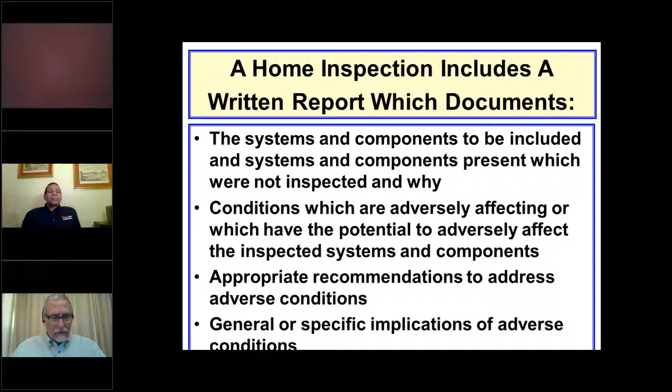The state of Arizona, for instance, requires that you put the implications of adverse conditions. They also require in Arizona that you put in every single thing that is in the state of Arizona Board of Technical Registration components and systems, even if they're not there, they have to be in your report. Doesn't matter, so it's boilerplate. And if they find they're not in there, they'll bring you on the carpet.

Know your standard. Again, we're not there to look at adequacy, effectiveness, and efficiency or causes. So whatever we find when we're inspecting, whether it's on cooling systems or plumbing systems, it doesn't matter. And we all know we're not required to determine compliance with codes, regulations, installation guides, and so on.

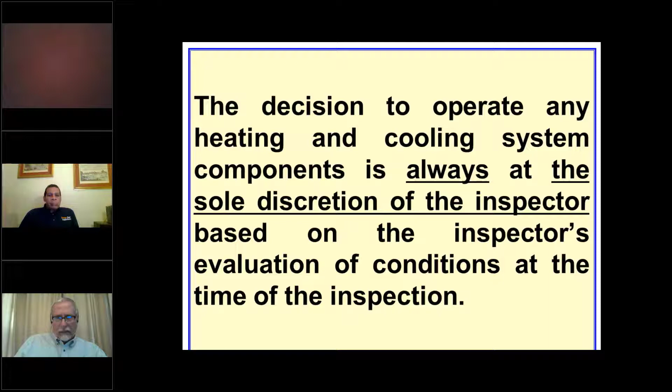This is important. The decision to operate any heating and cooling system always has to be at the sole discretion of the inspector, based on the inspector's evaluation or assessment of conditions at the time. With heating and cooling systems, that can be very important in terms of outside temperature, for instance, above which or below which you don't operate certain heating or cooling system components.

Now we're going to talk tonight about split systems. We're not going to talk about evaporative coolers or individual room air conditioners or anything else. We're going to talk about split systems.

As it says, it's basically, as we know, a mechanical indoor air cooling system. It incorporates a compressor, condensing coil, an evaporator coil, and an air handler, and it moves the air through a system of ducts. The two coils are separated from each other, that is split, and the compressor circulates a refrigerant between the coils.

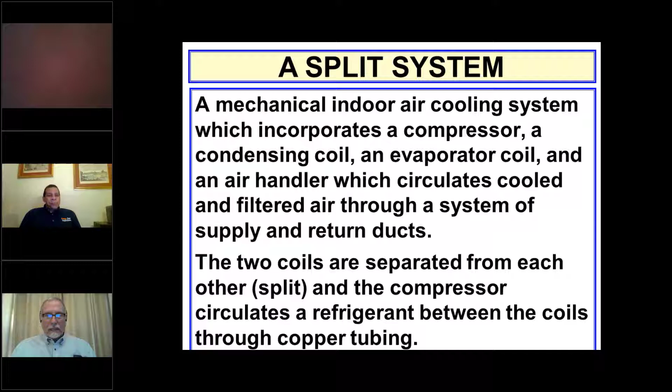The basic components: a thermostat to control the system operation, the outdoor unit which houses the fan, condenser coil, and compressor, the indoor unit, typically either a furnace or a fan coil, which houses the evaporator coil and fan to circulate the cooled air, copper tubing to carry the refrigerants, an expansion valve which regulates the amount of refrigerant going into an evaporator coil, and the ductwork which allows it to circulate.

We have to remember a little bit of our high school physics, not much, to understand how air conditioners work, and they're actually pretty simple. A refrigerant is a compound that absorbs heat easily. So you have a refrigerant, in the old days Freon, and nowadays different materials, and a compressor.

When you compress a gas, it gets hot. So the compressor, when it's in the cooling mode, comes on, the refrigerant gas is compressed, it rises to a temperature of as high as 150 degrees. That 150 degree refrigerant in a gaseous form, in a vapor form, goes out through a set of tubes in the condenser.

Air is pushed across it or pulled through it, which drops the temperature of the refrigerant gas to the point that it becomes a liquid because it's cooled down. Now, cooling is a relative term. It may still be 100 degrees, but it's in a liquid form.

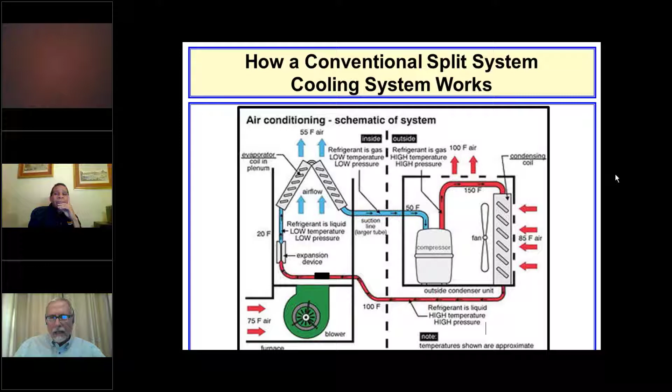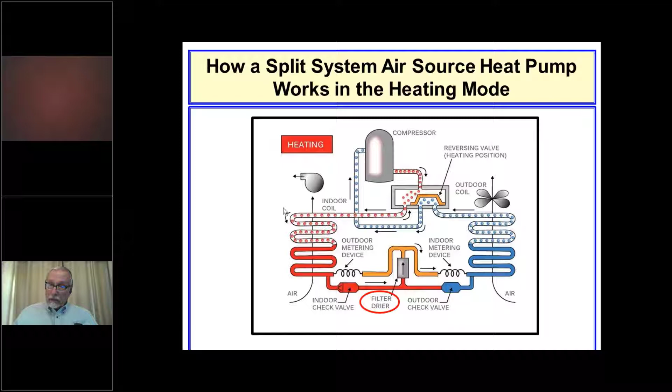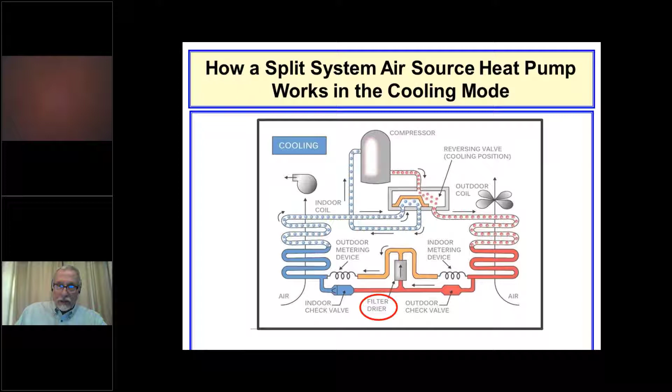And you make a good point. Our business is a technical business. We need to use correct technical terminology. Thingamabob and doohickey don't work for us.

And that doesn't apply simply to air conditioning systems. I've had to correct inspectors over the years. Don't call the device on a wall that you insert a plug end into to turn on a lamp the plug. It's the receptacle outlet. It's not the plug.

An outlet in electrical terms is any place that the electrical system is open to the room, to the outside, where it comes out of the wall or the ceiling or the floor. It's an outlet. Receptacle means you put in a device that receives the plug end of something you're going to plug into it. But we'll go on.

The purpose of a filter dryer is to reduce the potential for contaminants, such as water, to mix with materials in the system and produce acids. And it reduces the potential for impurities to contaminate the control element, the capillary tube or expansion valve, as well as for contamination of the compressor itself.

So the filter dryer is on there for a purpose. Sometimes you'll see them, sometimes you don't. Generally, best practice is to locate the filter dryer as close on a split system air conditioning system, as close to the evaporator coil as you can, so that it catches stuff early before it enters the evaporator coil.

There's a picture of a filter dryer. And if you see them, obviously you're going to look at it, and if it looks like it's damaged or rusted or otherwise, it's an adverse condition and you're going to report it.

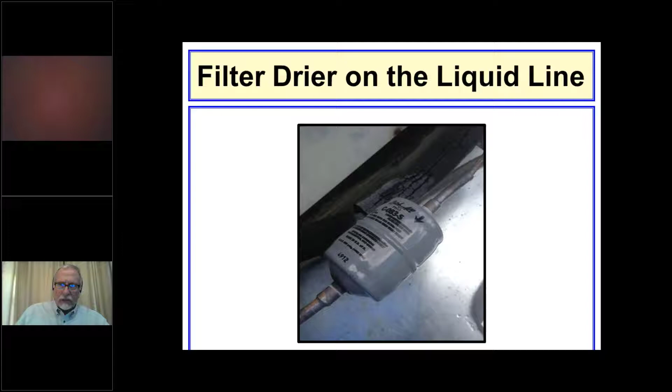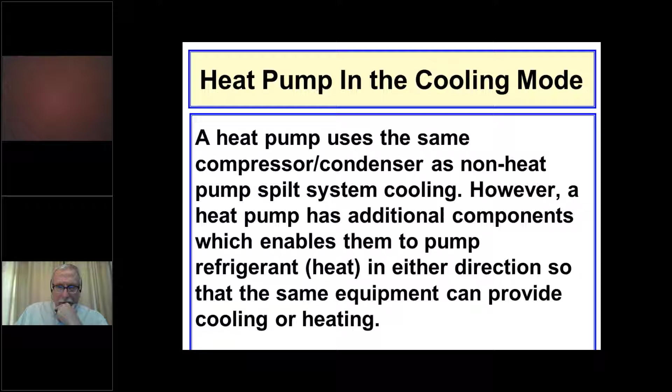As I said, the heat pump uses the same compressor condenser as a non-heat pump split system. However, the heat pump has the additional components which enables them to pump refrigerant heat in either direction. So it provides both heating and cooling, or can.

Heat pumps include a reversing valve, a bidirectional expansion valve, and in modern heat pumps, often these two valves are incorporated into a single component. And an accumulator. Now, you typically won't see the accumulator. It's usually inside the case holding the compressor.

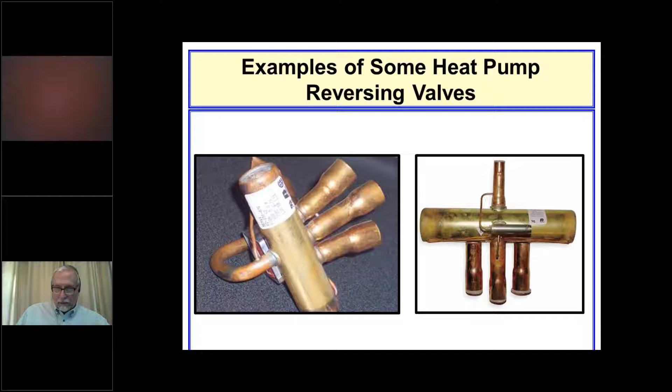There's an example of some heat pump reversing valves. Some HVAC contractors call them the cigar. If you can't find a data plate that says it's a heat pump, you can look down in through the top of the condenser typically, and if you see this, what they call a cigar, that's the reversing valve. There's an accumulator, but you can see there's the compressor next to it. It's inside the case. You're very likely not going to see that.

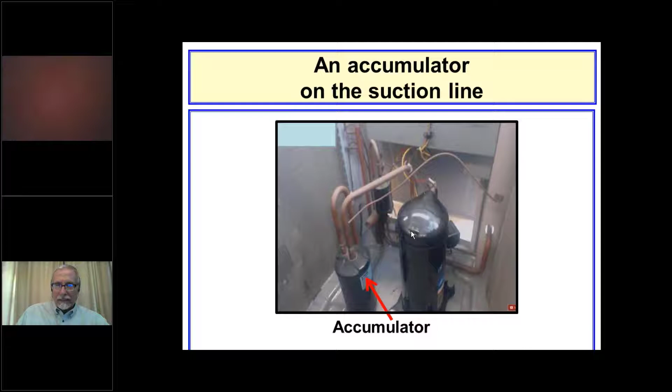Its function, it's on the suction line, return line of a heat pump, close to the compressor. It acts as a receiver during the heating and defrost cycle when system imbalance or overcharge from field service could result in excessive liquid refrigerant, which can damage the system. It can store the refrigerant until needed and feed it back into the compressor at an acceptable rate.

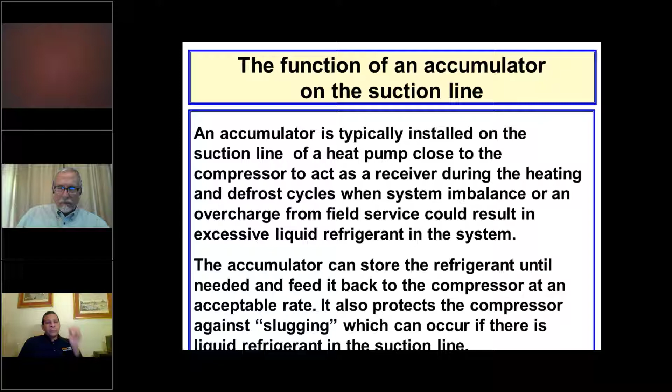So it protects it against slugging. And slugging is simply, remember our physics, you can't compress a liquid, which is why hydraulics work. You move the liquid at one end, it moves at the other, but gases can be compressed. And if liquid refrigerant enters the compressor...

It will fall directly into the crankcase and eventually cause the lubricating oil to foam. You can burn out a compressor because it won't lubricate properly. And so the accumulator reduces the potential for this to happen.

I will mention something right now. You'll notice I use reduces the potential for. This is something I emphasize.

There's a reason they don't call them vapor barriers anymore. They call them vapor retarders. There's a reason your watch isn't waterproof, it's water resistant. Barrier and proof are absolute terms. And we don't like to speak in absolute terms because then we're held to that level of the statement that nothing will ever happen. So you'll see a slide later which talks about using the phrase consistent with, and again, reduces the potential for, increases the potential for, but not eliminates or prevents.

When the outside temperature is below 65, in order to reduce the potential for damage to the compressor, that's when to operate it - only when the outside temperature is below 65, and that means take the temperature around the compressor. If the compressor's on the north side of the house, don't go to the south side where the sun is shining, or the east side where the sun has come up in the morning. Measure the air temperature around the compressor. That's the temperature you want to be aware of.

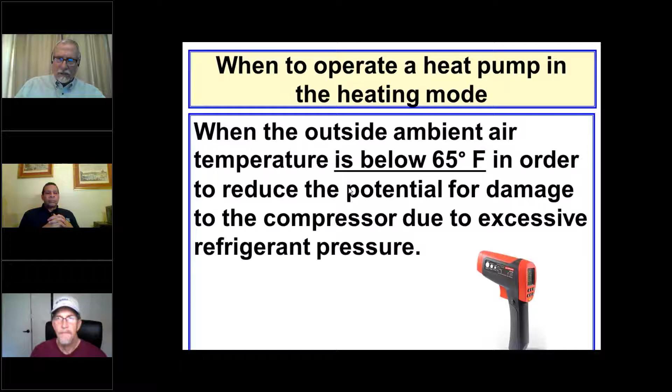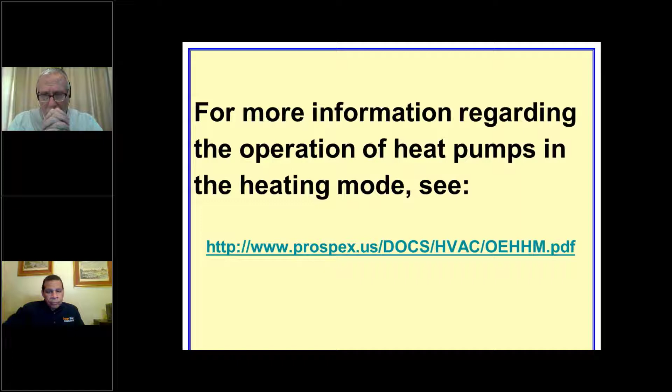For more information regarding heat pumps in the heating mode, I'll give you a little time to write this down. There's a very good ProSpex article on this. You can go in and read it to learn more about heat pumps in the heating mode.

Always note where your thermostat is set before you operate the heating or cooling systems, and return those thermostats to the original settings after completing the inspection. That's critical.

When to operate in the cooling mode: heat pumps, cooling systems, and central refrigerated cooling systems or split systems should be operated in the cooling mode only when the outside temperature has been at or above 65 for a minimum of 24 hours prior to the inspection, or for sufficient time to allow the oil in the compressor to reach a viscosity which will permit it to properly lubricate the compressor. So if you can't do it, simply note in your report that the compressor was not operated due to outside temperature.

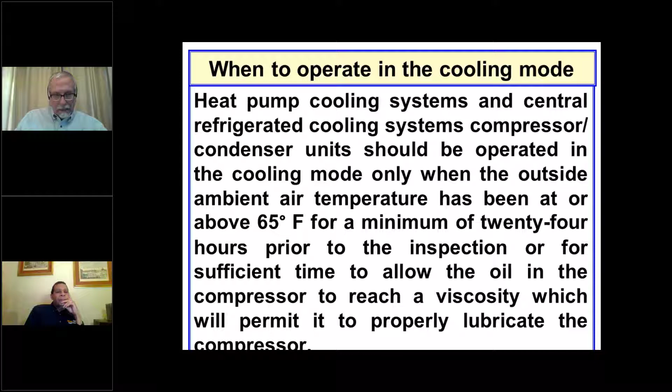And you've covered yourself, but you want to say so. When temperatures permit operation, before switching a conventional gas or electric furnace and heat pump split system cooling system from heating to cooling or vice versa, give it a little time to let it finish its cycle. If it's in the cooling cycle when you go in the house in the summer, let it shut itself off at whatever temperature the thermostat is set.

Kevin? Hello, I have a question. When that outside ambient temperature, the 65 degrees, does that apply when there's a heating belt around the compressor keeping that oil warm? Some compressors have heaters, both split system regular air conditioning compressors with gas furnaces, and some don't. But I would still say, I'm not going to take the chance, I'm going to just not operate it. I don't have the instructions for it, I don't know that the heat belt is working. That's me, I'm not going to operate it if the outside temperature is not up to 65. Thank you.

A quick question: so if the air temperature right now is 75, but it dipped to 50 last night, you're not going to operate it? No, I didn't say that. I said take the temperature of the compressor. If the temperature is... remember, 65 isn't a magic number, it could be 64, it could be 62. The idea is that you don't want the oil that lubricates the compressor to get so thick, to have such high viscosity that it won't circulate.

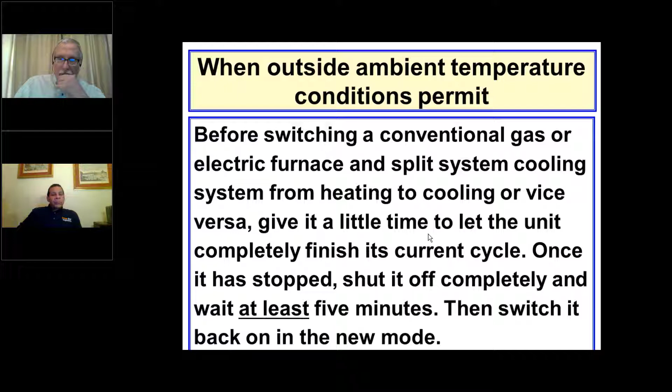Once it's run through its cycle, turn it off, wait at least 5 minutes, then switch it back on to the next mode. If it's in cooling, let it finish its cooling cycle, turn it off, wait 5 minutes, then put it back into heat if that's what you're doing, and vice versa. It's important to do this because the refrigerant needs time to go back to its starting pressure. Forcing the unit to start running while the pressure is still high can cause the compressor to lock up and increase the electricity it's drawing, which can blow a fuse or trip a breaker.

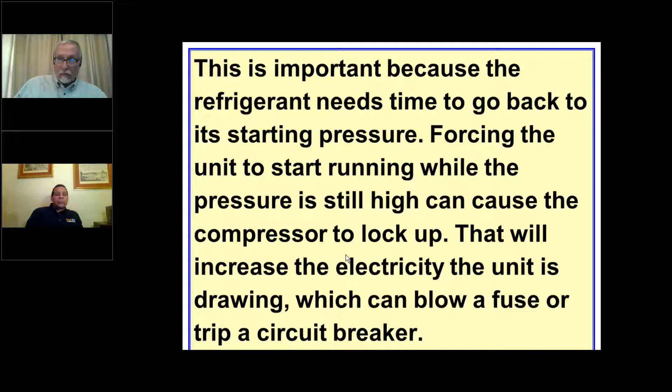When switching between heating and cooling, don't set the temperature to something drastically different right away. Obviously, if you're cooling and the house is at 72 degrees by the thermostat, you're going to set it at 71, not down to 68. Don't make it drastic, raise or lower the temperature by a few degrees at a time.

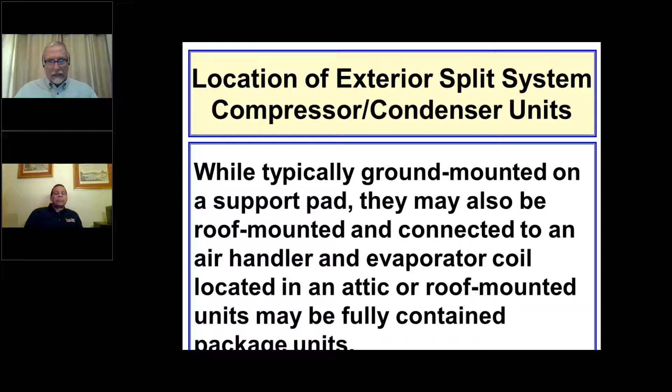Now, when you're inspecting a central system, we're going to look at the exterior components to inspect. You want to be aware of the location of the compressor condenser unit. While typically ground mounted on a support pad, they can also be roof mounted and connected to an air handler. An evaporator coil may be located in an attic, or it can be a roof mounted package unit that contains everything: the evaporator coil, the burners if it's a gas fired furnace, and the air handler, everything. Depending on the part of the country you're in, you will see these in different places.

And down in Phoenix, I used to see these mounted on the roofs all the time. This is a roof mounted package unit. There's your service disconnect, there are your supports, there are your flashings.

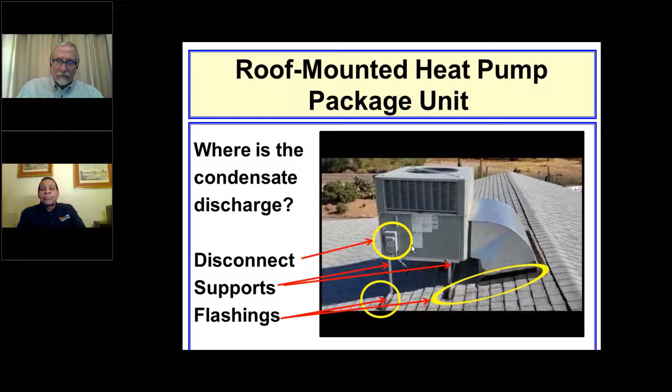It simply says here, where's the condensate discharge? It's on the other side, we just can't see it, but there should be a condensate discharge. We'll talk about those in a while.

With ground-mounted compressor condenser units, the support pad should be impervious to moisture and to insect and vermin damage. It should be protected from direct roof runoff. In other words, if it's under an eave where roof runoff would run directly on top of it, that eave should be guttered. The water does not need to run directly into the compressor.

Generally, the rule is it should be level within 10 degrees, because when it's significantly out of level, the oil in the system gets off to one side, and depending on what they're using to move the oil through the system, some of them use a slinger, it won't pick up enough oil. So always, if it's not within about 10 degrees of level, note that in your report as an adverse condition.

It should be away from clothes dryer and gas-fired appliance vent terminals. Clothes dryers because you don't want all the lint and the hot air blowing on it, and vent terminals for, I think, obvious reasons. Away from airflow obstructions, bushes, walls, and so on. 12 to 18 inches minimum on the side and 5 feet minimum above.

And not adjacent to a condensate discharge outlet that's going to soften the soil, because often they're set on soil where you have a basement or a crawl space, on soil that was put in as backfill after the foundation was poured. So you don't want to soften that soil by discharging condensate into it.

You want to look at the condenser coil fins, or the outside coil fins. Are they clogged? Are they dirty? Are they obstructed? Are they damaged? Look at them from the inside where you can see through the top as well as the outside. Protective fan and outside coil grilles, are they missing, damaged, or missing parts? You want to look at that.

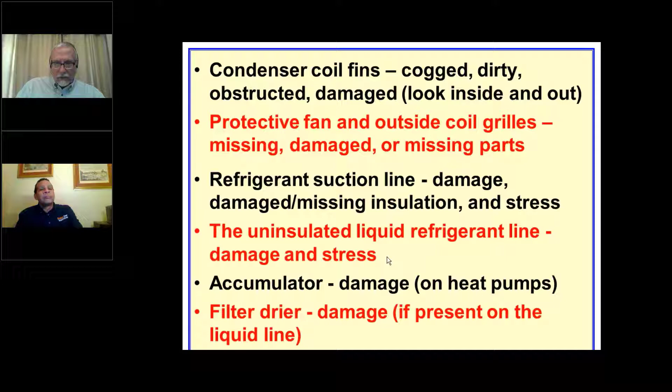Electrical components that may be damaged or loose. Any valves that are visible that are damaged.

Exterior electrical service disconnection means - if it's not located within sight of the exterior unit, if it's loose, if there's damage to its housing or the conduit between the disconnect and the compressor condenser, if it's not protected against unauthorized access, children, and at least 5 feet or greater from a pool or spa. And the reason for the protection from children, we'll see here in a minute.

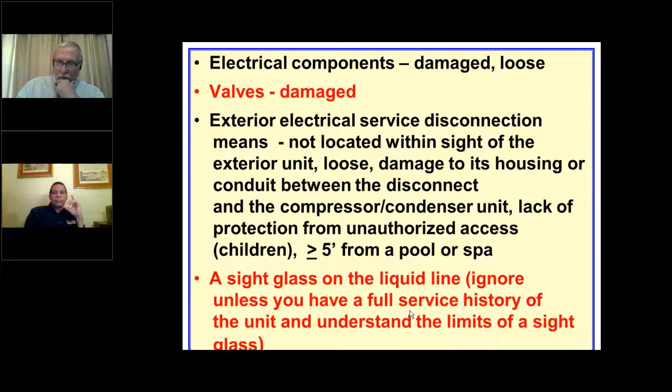If it has a sight glass, ignore it, because there are too many factors that you're not going to be aware of, and you don't have a full service history to understand the limits of a sight glass. There's a pull-out cartridge fuse disconnect.

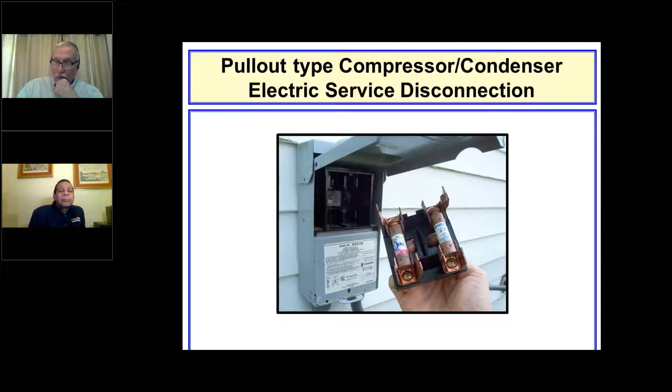All right, those things are often within 4 or 5 feet of the ground. Sometimes they're on the side of the unit. A child pulls that out and sticks something in there where the blades go in. No, that has to be secured. Should have a little lock on it or some method of securing that cover so a child can't get into it. There's airflow obstructed by shrubbery.

Condenser coil location requirements. Here you have under a deck or other surface above it. You see 4 to 6 feet recommended. 5 feet is sufficient.

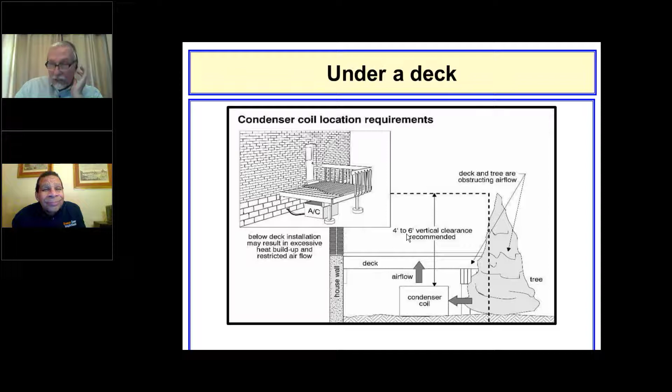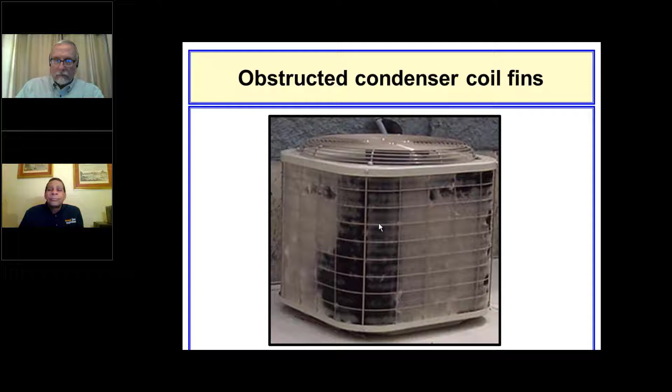There's a condenser coil that's obstructed by debris, leaves, and so on. Here's one that's obstructed by cottonwood cotton. We have a lot of cottonwood trees out here in Colorado, and in a good spring, they'll put out all of this fine cotton, they call it, into the air. I've gone on commercial jobs where there are multiple air handlers on the roof of a flat roof of a commercial building, industrial building, and literally been able to take a blanket of cottonwood cotton off the coils. So you want to look for obstructed.

You don't see a neutral, do you? Where's the grounded neutral? It's not necessary. One of the 120 volt or 125 volt measured hot conductors is always alternating opposite of the other. So when one of the wires is bringing in current, the other is returning it to the panel and completing the circuit.

Thus one of the others is acting as the neutral, and both the compressor and the condenser motors are typically 240, unlike a clothes dryer, where you have to have a neutral because you've got a 120 volt circuit as one of those incoming 120 volt legs for a 220 clothes dryer, and it's operating the motor that turns the drum in the dryer. That's a 120 volt motor. The elements that provide the heat for the dryer are 240.

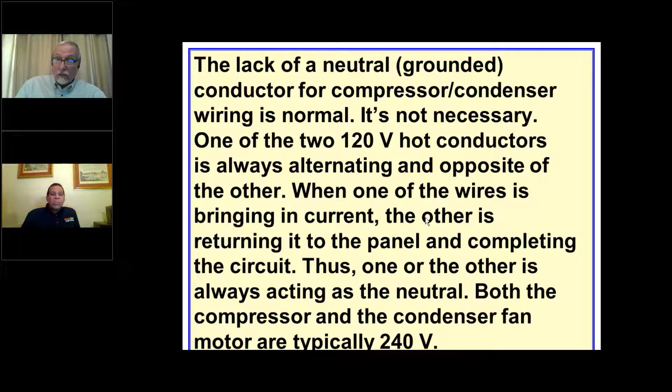So the difference, if one of the 120 volt legs is pulling, say, 23 amps and the other is pulling 17 amps, that means you have 6 amps running on the neutral, which is why you now have to have a ground with range ovens and clothes dryers, because you will actually run current on the neutral, but not with the air conditioner.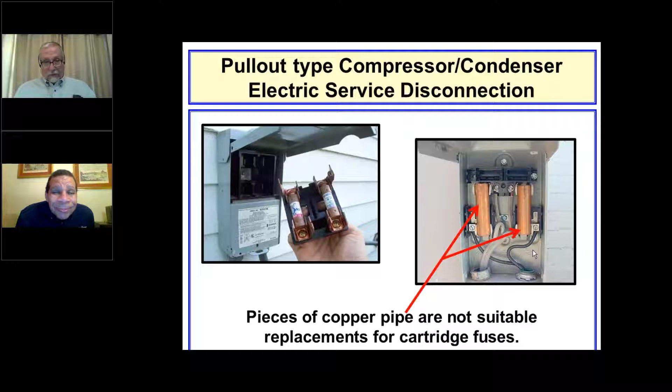I don't know if any of you have ever seen this, but I have seen copper tubing put in place of cartridge fuses. No, nope, don't want to see that.

You should have, and this is more recent in terms of the last 50 years, a receptacle outlet for use by the service technician, so they can plug in equipment they need while servicing a unit. Whether it's in an attic, crawl space, or outside, it should have a 125 volt, 15 or 20 amp GFCI receptacle outlet installed within 25 feet of it.

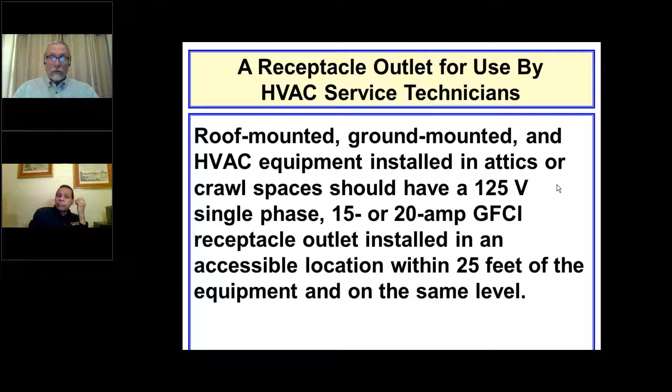If you have roof mounted units, I know there are people from Florida and other parts of the country, all electrical should be installed in electrical metallic tubing or in liquid tight flexible metal conduit. Other HVAC wiring should be installed in conduit appropriate for the location.

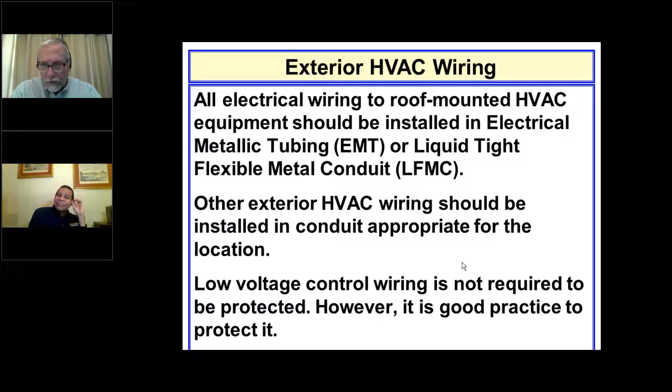Low voltage wiring isn't required to be protected, but it's a good idea, because if the insulation gets brittle from exposure to weather, it can short out on the two or more wires in the control, the 24 volt low voltage. If one shorts out against the other, it can blow the controls, and now your thermostat's not going to work. So it's not required that they be in any kind of conduit, but it's not a bad idea to protect them.

If conditions allow the system to be operated, listen for atypical noise and vibration during operation of the compressor condenser. After the system has been in operation for 15 minutes, the suction line should be cold to the touch, should not be frosted or ice coated, and the liquid line should be hot to the touch.

Frost or ice on the suction line may be caused by obstructed airflow due to a dirty coil, dirty air filter, collapsed duct insulation, and a number of other factors. But if you see frost and ice, write it up as an adverse condition and call for a qualified HVAC contractor.

One of the things you can do in winter, when you can't operate a split system compressor condenser on a regular gas-fired heating system, is you can still look at the compressor to see if it's level. You can still look at the insulation on the refrigerant lines. You can still look for damage and obstruction of the condenser fins. I've actually looked down inside and seen cracks in the fan blades where they're starting to fatigue.

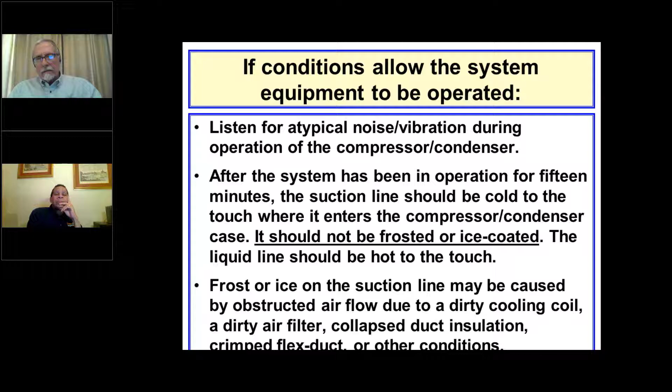And if it didn't operate, it was seized. There's a gutter over the compressor condenser if it's under a roof eave, so there are things you can do to still inspect the system. You just can't operate it.

On roof mounted units, always look at the supports and the flashings, and make sure they're away from any roof mounted dryer vents and gas fired appliance discharge terminals, away from airflow obstructions, just like before. Also make sure the condensate discharge piping is not damaged.

Or improperly located or obstructed. There's a low exterior condensate drain adjacent to a foundation. Not such a big deal perhaps on a slab on grade home, but it may be on a home with a crawl space or a basement.

Also in areas where you have an attic mounted air handler, you're going to have two condensate discharges: one for the primary pan that normally drains the condensate off the evaporator coil, and a secondary pan in case the primary pan or its drain becomes clogged. The secondary pan should drain to the exterior.

In my view, and certainly in certain parts of the country like down in Phoenix, they want that secondary pan drain to be up high where you're going to see it dripping. The primary can be down low, but if you see it dripping, you know there's a problem with the primary. So they want to see it up high.

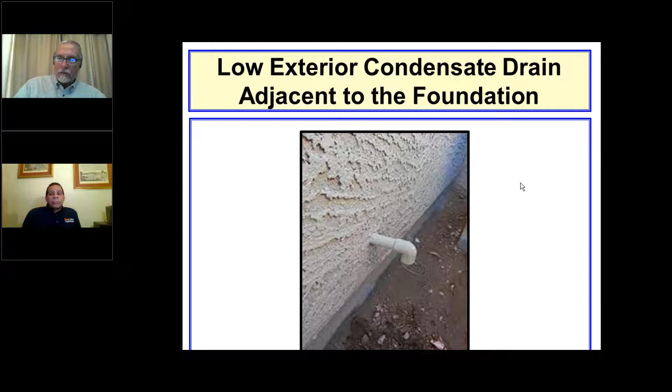Some people suggest you bring it out a little ways from the wall and let it drain in front of a kitchen window. So if you're standing there and you see water coming out of it, you know that you've got an issue with the primary condensate drain.

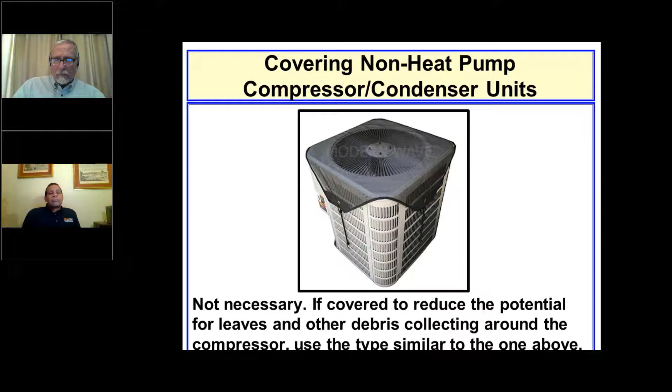Heat pump and non-heat pump compressor condenser units don't need to be covered. In fact, it's recommended that they not be. The manufacturer makes those things to be exposed to the weather. If you put a full cover on it, it can't breathe. You can get condensation underneath the cover, and corrosion of the components inside. So if it has a cover at all, it should be a cover like this, just to keep debris out, leaves and other things when it's not in use.

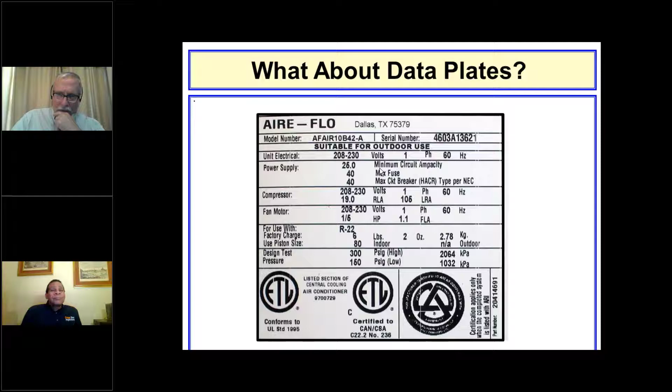A lot of inspectors like to look at data plates and try to interpret them to determine whether something is right, wrong, or whatever. One of the biggest things they use them for is determining the age. If they've got a furnace, compressor, or air conditioning system, they can look at the brand and serial number, which is often where they code the year of manufacture.

They'll say, well, this was manufactured in 2000, it's 2021, so it's 21 years old. I want to go back and remember that the purpose and scope, according to ASHI's standard, is that you're to report components that are near the end of their service lives. That may be easy enough to do on a roof covering, but not so with HVAC systems. You're not required to give the remaining life expectancy of systems and components.

Furthermore, age alone does not determine whether an air conditioning system is near or at the end of its life. Unless you have the service history and use history, how many months of the year it was used, how often it's been serviced, you can't look at it and say it's 21 years old and is approaching the end of its life.

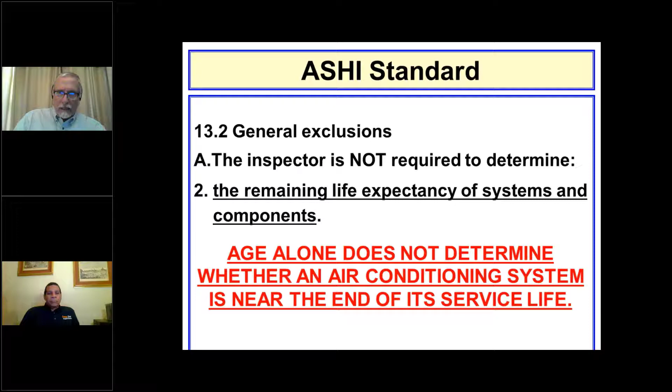If you operate it and it performs its normally intended function, produces cold air, it's not making funny noises, condensate's coming out the condensate drain, it's not appropriate to recommend that it be replaced or that they consider replacing it in the near future. Home inspectors aren't fortune tellers and you're not required to predict the future.

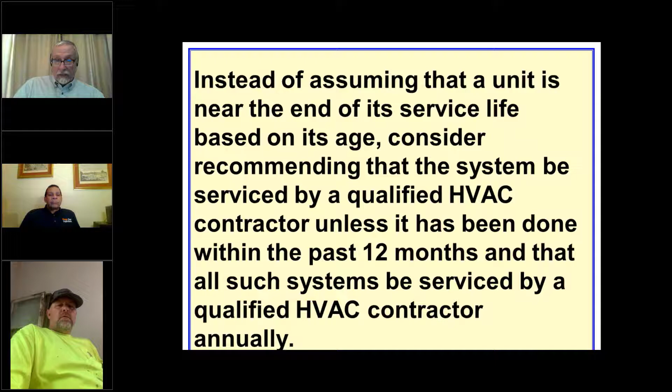So my suggestion is don't do that. Instead of assuming a unit's at or near the end of its life based on age, consider recommending that the system be serviced by a qualified HVAC contractor, even if you find nothing particularly wrong with it, unless it's been done within the last 12 months, and that all such systems be serviced by a qualified HVAC contractor annually. That's just good boilerplate to put in a report.

Now we get into the interior components to inspect. You've got a blower fan in an air handler case connected to both a supply plenum and containing an evaporator coil, and both the chilled air distribution duct system and an air return plenum and duct system.

When you're looking at the fan, which is usually a squirrel cage fan, look at the rotor blades inside. If they're covered with dust, dirt, or drywall debris, write it up and call for service.

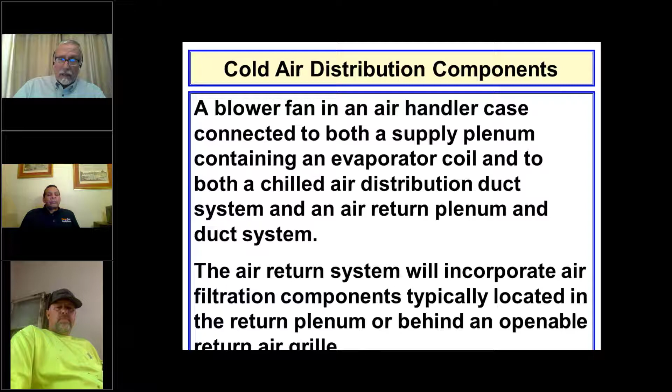With air conditioners, dirty blades on a squirrel cage fan can reduce the efficiency of the system by as much as 10%. Also look at the ends of the motor. The motor depends on air being pulled through as the fan is operating to cool the motor. If it's caked in dust, which is usually the case if they haven't changed filters on a regular basis, write that up.

We know where they can be installed. We talked about that.

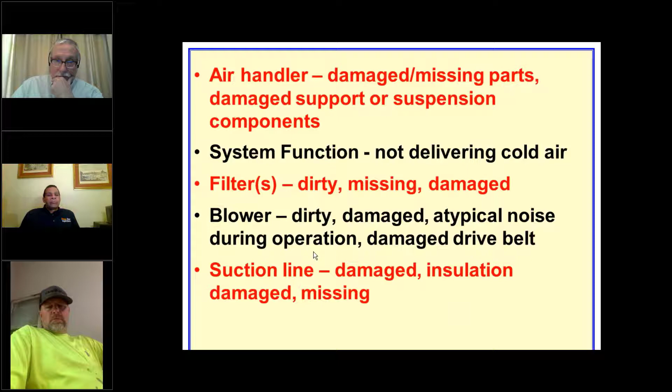You want to look at the air handler for damage or missing parts. We said dirty, damaged support or suspension components, not delivering cold air, filters missing, dirty, or damaged, blower dirty, damaged, atypical noise during operation, and on older models, maybe even a damaged drive belt, and suction line damage, insulation damage, and so on. So for all those things, we're looking at it on the interior of the house.

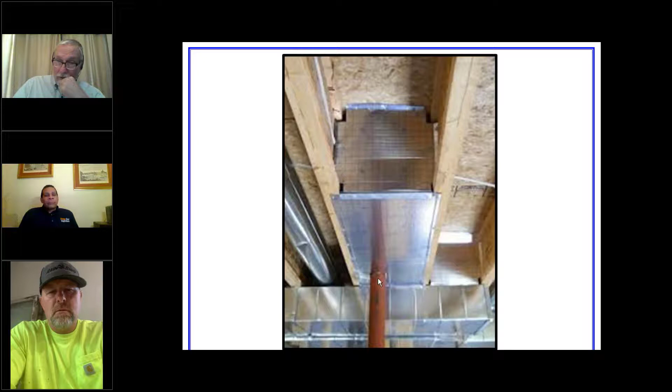Using a space between joists for return is pretty common where you have a basement or even a crawl space. However, it should be sealed. It shouldn't simply be a piece of sheet metal nailed to the bottom of the two joists. There should be a sealant tape or sealant sealing it all the way around, making sure all of these joints are sealed. As for running a support column through the center of it, there's nothing that says you can't. You are obstructing the airflow a little bit in the return, but you should also be sealing it around where that column passes through the sheet metal.

Some inspectors may elect to measure the air temperature difference or split between the return plenum upstream of the blower and the supply plenum downstream of the evaporator coil as part of their evaluation. It's not required by the ASHI standard. You're not required to determine adequacy, effectiveness, and efficiency.

If you're going out and it's got cold air coming out of all of the registers, you've done your job. And if you've got reasonable volume - because you can talk to different contractors and they'll give you different temperature splits. Oh, 16 to 22, 15 to 20, 12 to 20, and so on. Who's correct? Now, if you, for instance, measure a 14 Fahrenheit

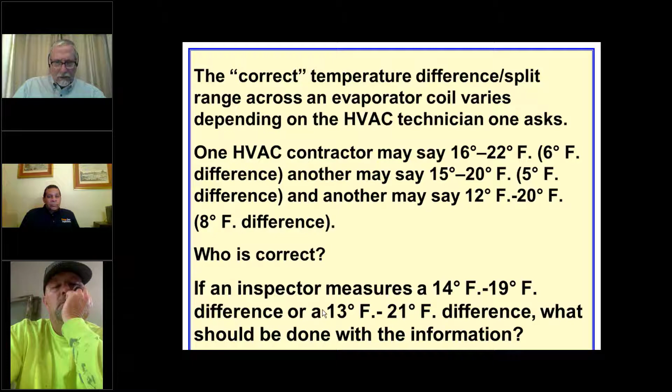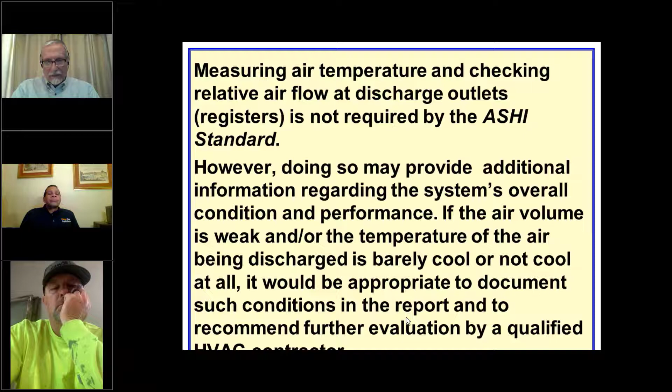difference, or 13, what are you going to do with that information? If you choose to measure it and you're not getting any difference at all, you're getting like 6 degrees, that's an issue. It's not providing cold air. And it's usually because something is clogged up - a filter or some other component that allows the air to be transferred through the system.

What about airflow and volume? Both air temperature and discharge volume are dependent on the system design and parameters. Factors such as duct length, type, configuration, support, joint leakage, and so on all affect temperature and volume. So again, I've been in a house where it's a very long ranch house, and you go back to the master bedroom, which was as far away from the air handler as it could be because the air handler was in the garage. They were getting almost no air discharged over that length into the master bedroom, which I wrote up.

Because it wasn't - it was producing mildly cold air, but not enough. And I asked the occupants, they said, yeah, we've never been able to get this bedroom very cold when the air conditioning's on. So they make fans that can be put in duct systems, booster fans.

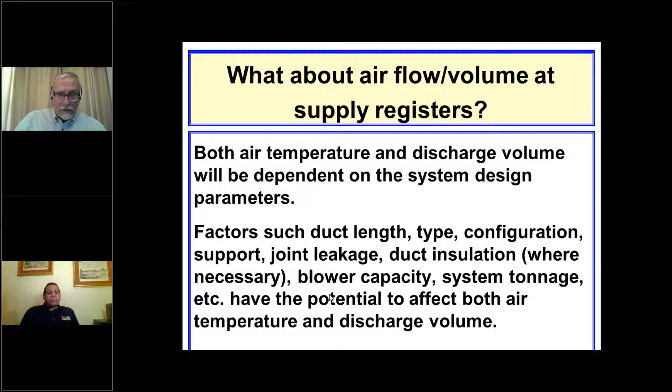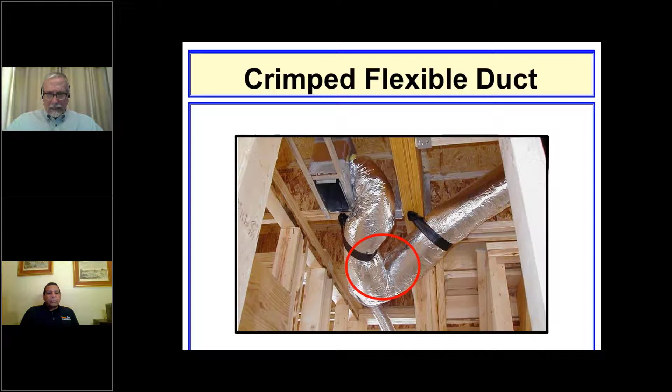There are ways that can be addressed. If you have crimped ducting in an attic, for instance, and I saw a lot of that down in Arizona because we had so many houses that were built slab on grade, the ducting ended up in the attic. And first, most of that insulated ducting, it's very common for it to be corrugated on the inside, so you're already disrupting the airflow a little bit. You start doing this and you're not going to get good airflow at all. Your best thing with flexible ducting is to use it for long straight runs, and where possible, make any bends as gentle a bend as possible, as wide a radius of bend as possible. But if you saw that in an attic, you should write it up.

I've had to correct inspectors on this for years. Don't confuse one or the other. A register is a grille with moving parts capable of being opened and closed and direct airflow. A return grille has no parts.

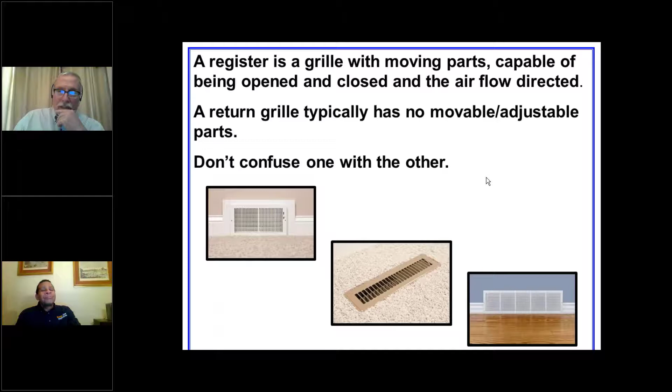Air handlers can be installed, as I said, in attics suspended from rafters, or set on a platform, top of ceiling joists or bottom chords of trusses, in interior mechanical spaces and basements. I've seen them in garages.

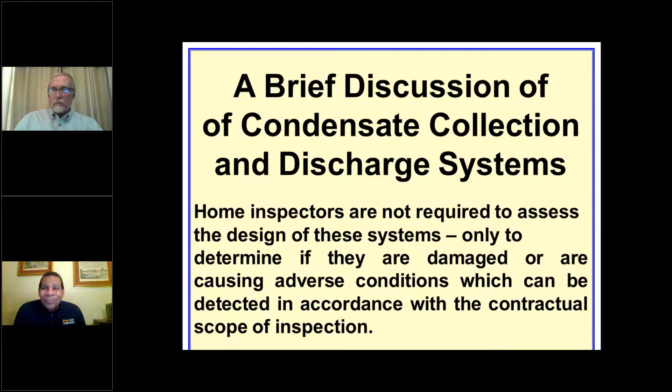An important part of a cooling system is the condensate collection and discharge. You're not required to assess the design of these systems, only determine if they're damaged or causing adverse conditions, which can be detected in accordance with the contractual scope of inspection, visual, readily accessible, and so on.

You'll have a primary collection pan. If you have evidence of leaking or obstructed drain, write it up. A secondary collection pan is required where, say, an attic unit is involved - check for damage, debris in it, evidence of leaking, improper slope, or obstruction.

In some cases, you'll have a condensate collection discharge pump where the condensate, say, is being discharged into a crawl space and it has to be pumped up and out of the house. A discharge piping system - look for whether it's clogged, damaged, evidence of leaking, improper installation, traps, cleanouts, and so on.

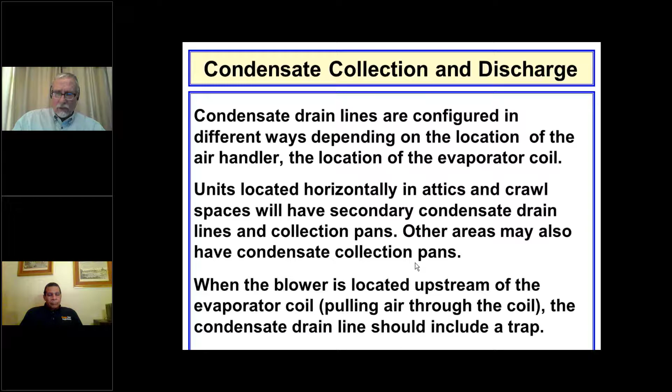The drain lines are configured in different ways depending on the location of the air handler and the coil. Units located horizontally in attics and crawl spaces will have a secondary condensate pan, as we said. Other areas may also have condensate collection pans. When the blower is located upstream of the evaporator coil, pulling air through the coil, the condensate drain line should include a trap, because otherwise the moisture will be sucked out. I'll give you an example here in a minute.

Some condensate collection and discharge systems may incorporate a safety switch designed to shut the AC off when the condensate collection and discharge system is obstructed or otherwise not working. They have a little float in them, and if it's not draining, the float rises as the water rises. It's connected to the controls for the system, and it just shuts it down.

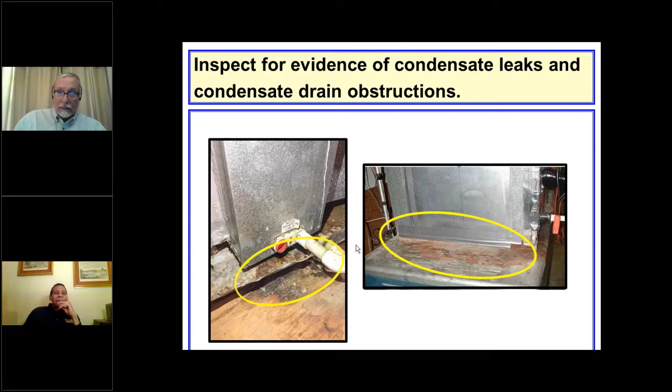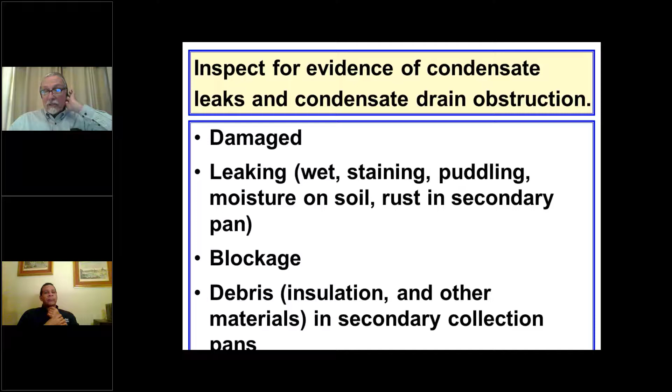There are some good examples of evidence where condensate has been leaking. You can see staining on the wood platform, rust in the secondary pan, rust around the plenum in this case. Inspect for evidence of that, and for debris or insulation in secondary collection pans. You're not required to place water in them and see if they drain, but there's a good example of a collection pan that had been collecting water at one time - look at all the rust in it.

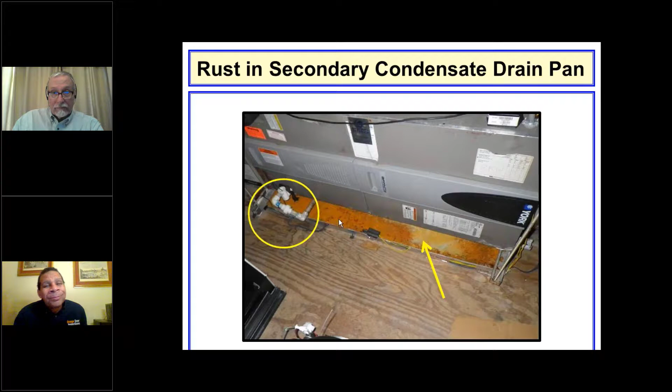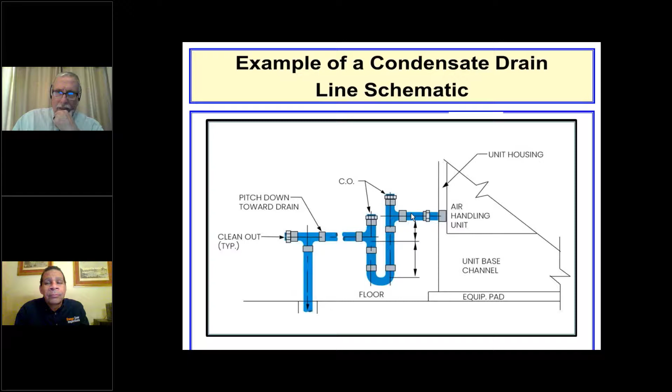This is just one schematic of a condensate drain line system. They should have a cleanout in them in case they become obstructed - you can run a flexible brush down through them to clean them out. Here you have a horizontal cleanout, two vertical cleanouts. A lot of times they'll be put together with a union so they can take the pipes apart and work on them if needed. That's just one example of a condensate drain line schematic.

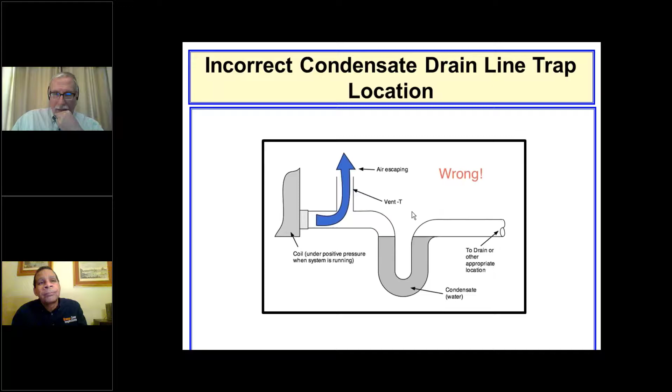When you have a trap, if you have air blowing across the condensate line - positive airflow instead of negative - you're just going to be blowing air out the vent, and that doesn't work. The correct way is to put the vent on the other side of the trap, so the condensate stays in there and acts as a trap, preventing airflow from going back the other way.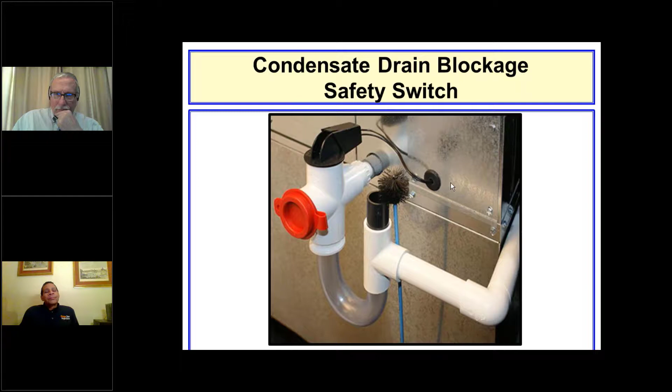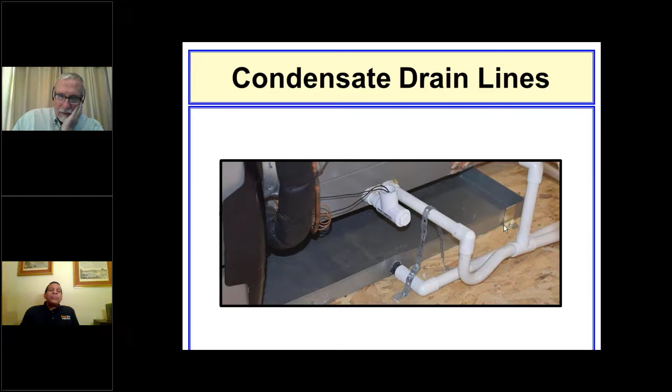There's a safety switch right there, and a cleanout brush leaning up against it. Notice they have a cap here so they can go in horizontally and clean that out as well. There's another safety switch there, and a secondary pan here - the primary pan is inside under the evaporator coil. They've secured the pan and the drain lines; here they used plumber's tape, or holy iron, an old plumber's term for that material. They've secured the pan as well - that's a good job there, a well-designed and installed condensate drain system.

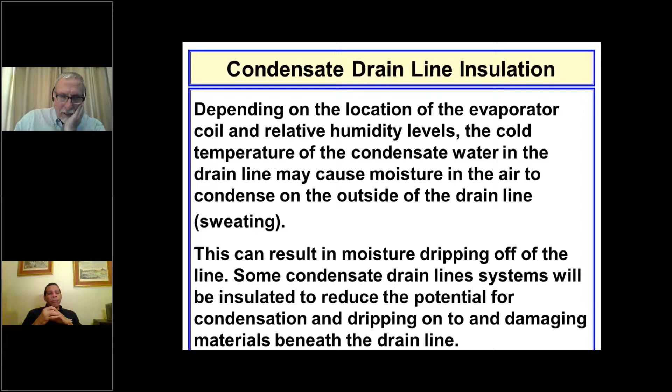In some areas with high humidity, they will insulate the condensate drain, because the cold water temperature may cause humidity in the air to condense on the outside of the drain line. It'll sweat, and this can result in moisture dripping off the line and damaging materials beneath it. So it's not your job to say it should have insulation unless you see evidence that it has been sweating. If you're in a climate like Florida with high humidity - we're very fortunate out here in Colorado, we don't have that.

If an evaporator coil is located on a roof-mounted unit, the condensate drain line is exposed to the sun. It has to be made of a material that's impervious to weathering and UV damage. PVC pipe is not appropriate unless it's properly coated with a UV-resistant paint or otherwise protected from direct sunlight exposure. Otherwise, it becomes brittle and breaks.

There you see PVC being used as a condensate drain on a roof-mounted unit. That was down in Arizona, and that got written up.

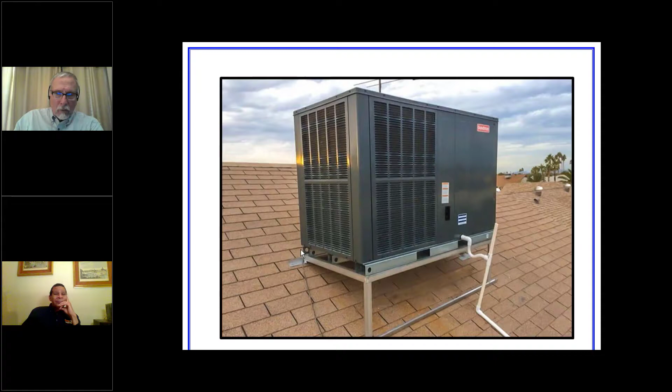You also see wiring here, which is control wiring just lying on the roof. Not a good idea. There's an example of a little float switch, a diagram, cross section of a safety switch. And there's the wiring going back to the controls to shut it off if water starts to rise and closes the switch.

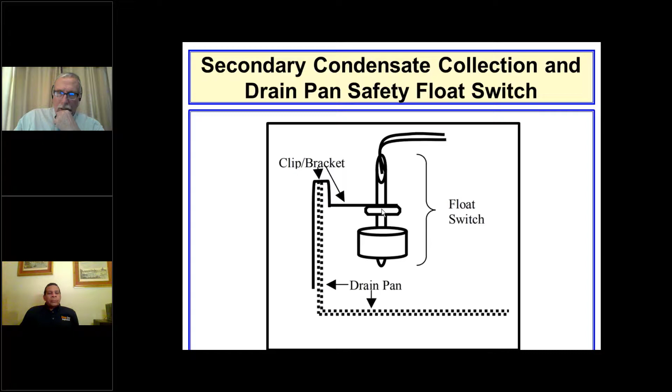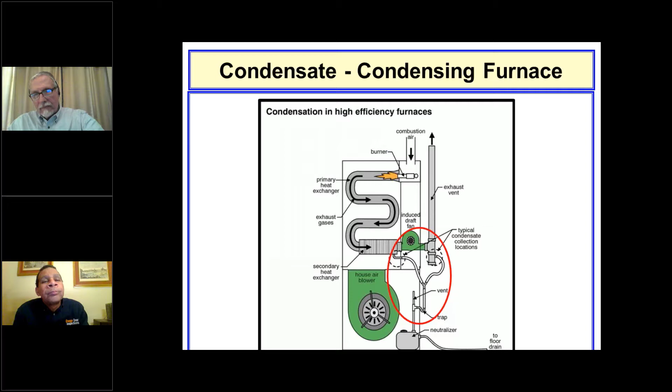Condensing furnaces, gas furnaces, whether there's an air conditioner or not, create condensate. So they have to have a condensate drain. And then you add to that here a condensing furnace with an evaporator coil. So you're draining the evaporator coil up here, and you're draining the condensate from the condensing furnace down here.

You notice down here it says condensate neutralizer. That's because the condensate coming off of the furnace when it's in the heating mode is slightly acidic. It has nitric acid in it, so they put a neutralizer on it, usually a cartridge that gets replaced periodically. And then down to a condensate pump, which is connected to a GFCI receptacle.

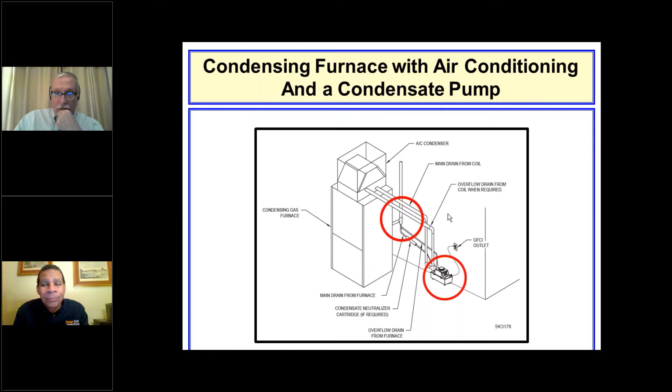So you look for primary pan evidence of leaking, secondary pan, and so on. We talked about that. Pumps, emergency shutoff devices, and associated electrical parts. Discharge piping system clogged, damaged, leaking - all of those things are things you want to look at.

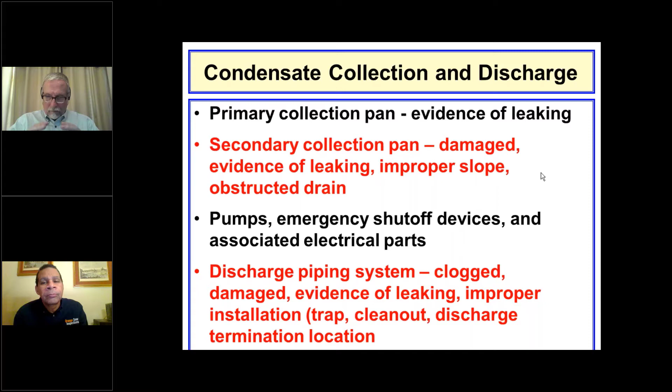The interesting thing is that when you become an inspector and you've done it enough, you look at these things almost taking them in all at once. You focus in once you see something. You look at the system with what I call floodlight vision first, then you go to floodlight vision, then you go to spotlight vision and focus in on things.

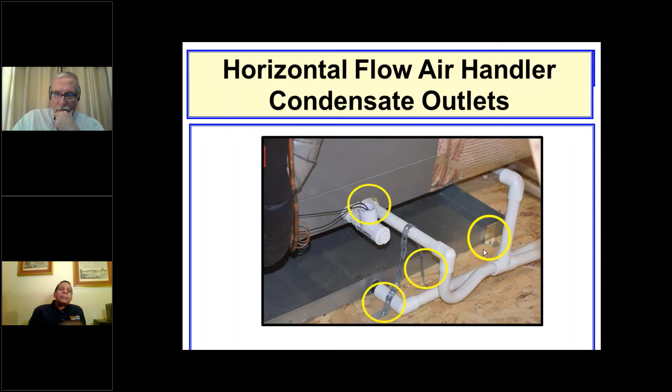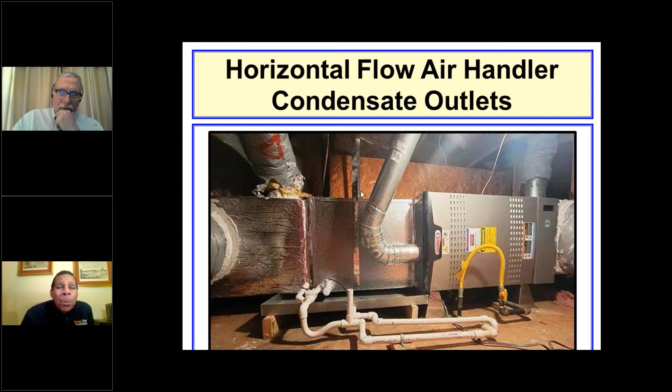There's a nice example of horizontal flow. They've got a safety switch, they've got vents, they've got traps, they've got pipes from both of them. And you can see that the air handler itself is sitting on some blocks, but we also have some straps that are suspending it.

Condensate discharge on the interior can go into a laundry sink. It can go into the tailpiece of a basin drain. It can go into the overflow of a bathtub, but it can't go directly into a plumbing stack, and you don't want to just stick it in the ground either. But these are appropriate, and I've seen these. I've seen them drain into a laundry stand pipe, which is fine because it's still above the trap.

And there's evidence of condensate leakage. If you see it, write it up and report it. There's what I said I was going to say earlier: don't guess. Describe what you see and know, not what you don't.

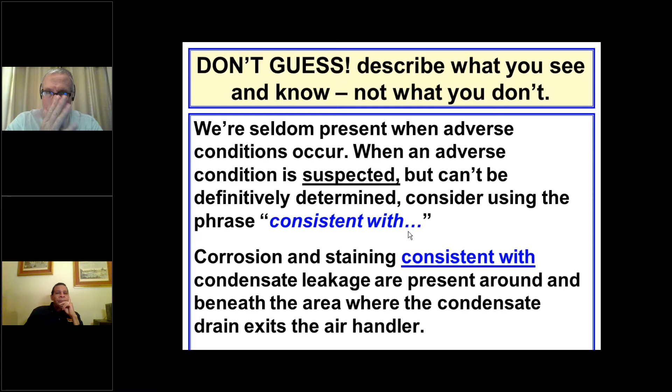Very seldom are we present when an adverse condition occurs. When it's suspected but can't be definitively determined, consider using the phrase 'consistent with.' Corrosion and staining consistent with condensate leakage are present around and beneath the area where the condensate drain exits the air handler. You looked at it, it was dry, you didn't see any liquid, maybe it's in the winter, it's not operating - consistent with.

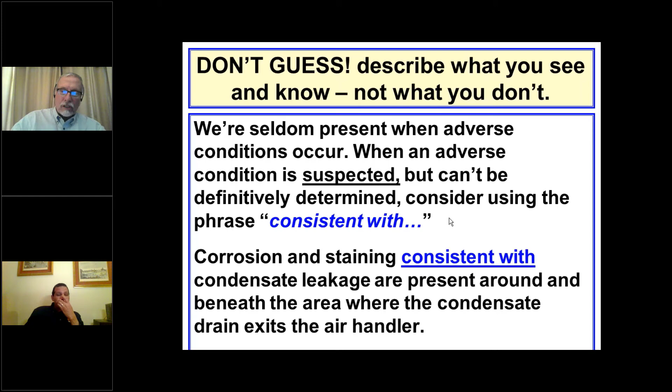Instead of saying it is this, it is that. And that pretty much ends the presentation.